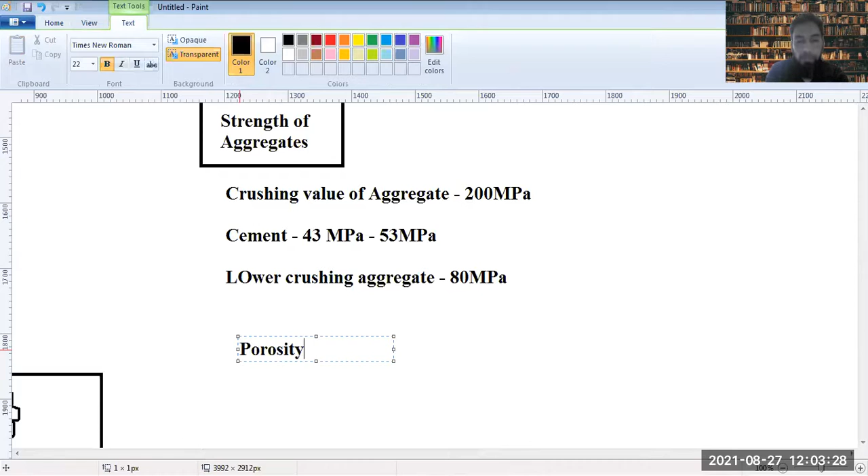So then comes the porosity of aggregates. Now, what is the porosity of aggregate? It is actually how much percentage of pores are there, the percentage of pores within the aggregate. How do you determine this? The easiest way to determine this is through the permeability and absorption tests.

An aggregate will have pores. A single aggregate would have pores. Now those pores would absorb water. So you fill up a sample with water, the pressure is applied, and thereby you're getting the amount of water that has gone into the pores, how many pores have been filled up.

So the absorption test is much simpler. You just keep the aggregates within the water, and then you check for its moisture content by taking it into the oven. So you check the mass before and you check the mass after you have put it in water.

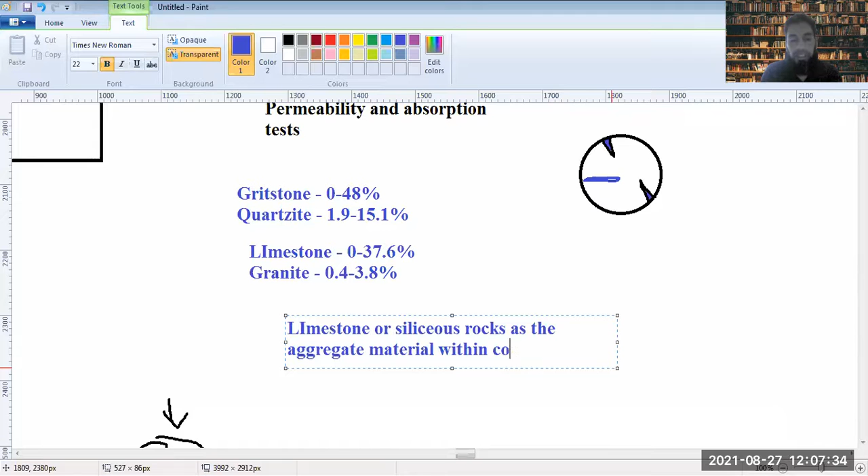The concrete, the reason being they are cheaper, and there is a covering of cement over the aggregates most of the time. Thereby, even if they have a large amount of porosity, still being cheaper, we use them. Otherwise, we would have gone even with the basalt rock, which has lesser porosity, and that stone is even greater in strength, but it would make a very costly concrete.

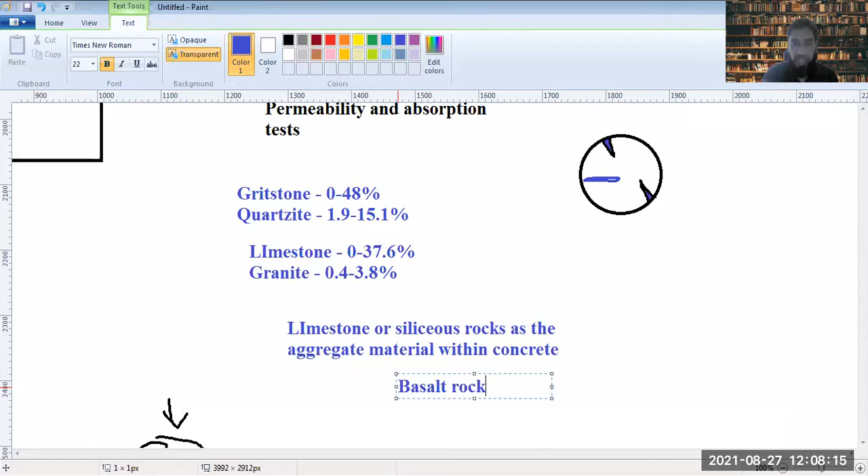A basalt rock or a granite rock would make... basalt rock is black in color. Somewhat like this. Yeah, the basalt rock. This is the basalt rock. So these types of rocks are quite costly, they have less porosity, greater strength, but you cannot use them in ordinary concrete because that will make the structure very costly.

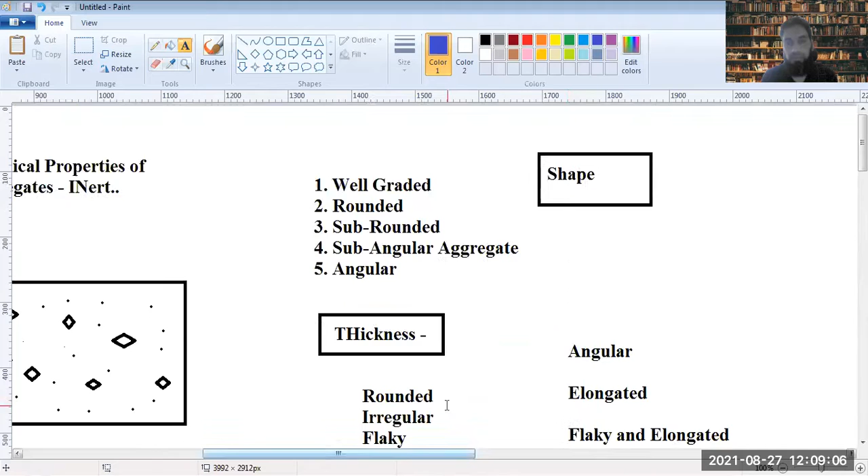So finally, coming to the gradation of aggregates, how do we get to the gradation of aggregate? Now, what is the gradation of aggregate? First of all, I just told you a term, graded aggregate. Gradation means from top size till bottom size, what are the various grades and their percentage? In simple terms, this is what it means.

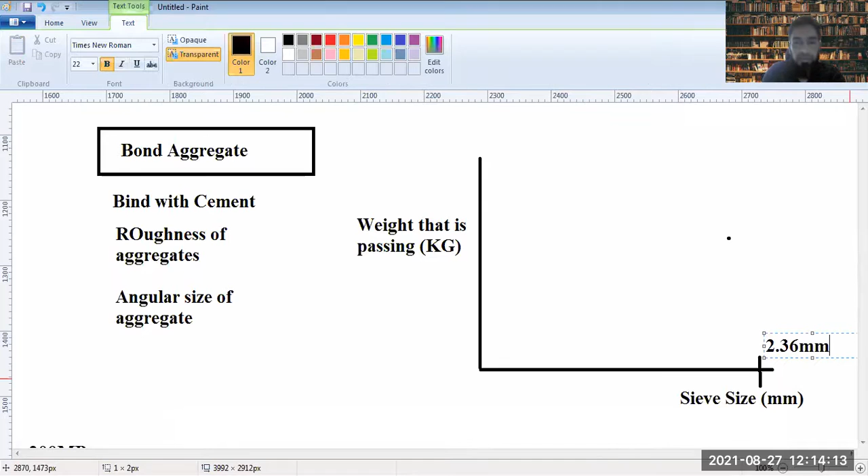Then the greater the sieve size, for example, this is 2.36 mm at the end, and here, for example, this is 150 microns. In terms of mm, that would be 150 into 10 raised to the power minus 3. So then what is the weight that's passing through here? That's very important. So the weight that's passing here would be somewhere here, this much, for example.

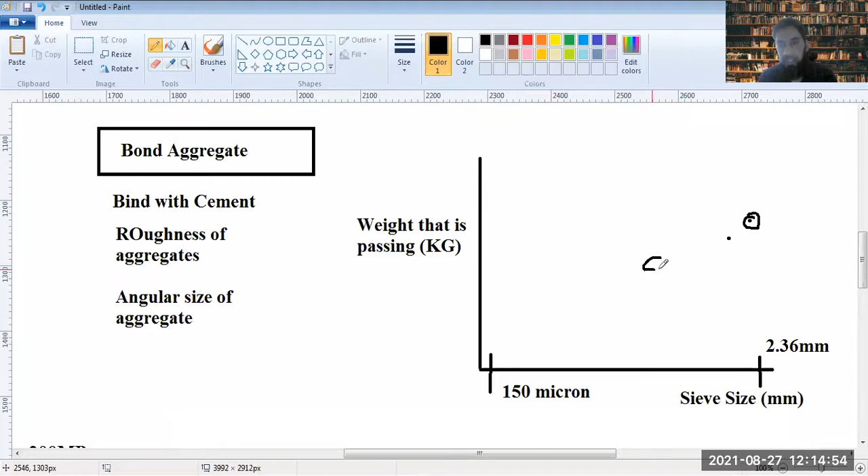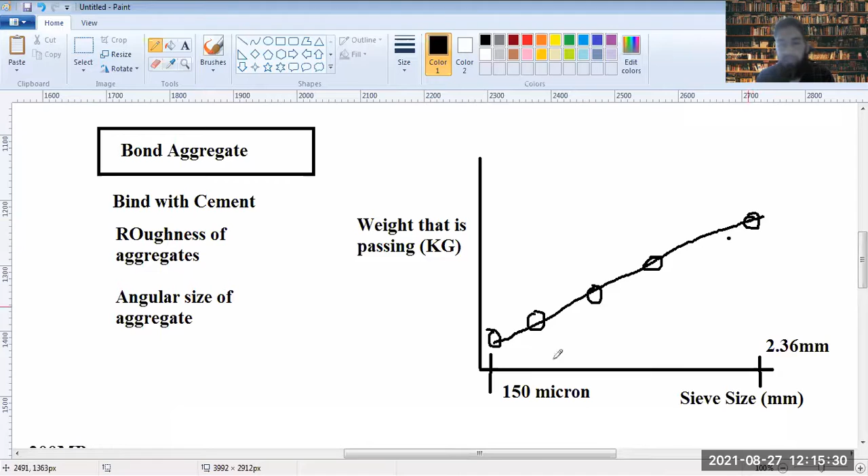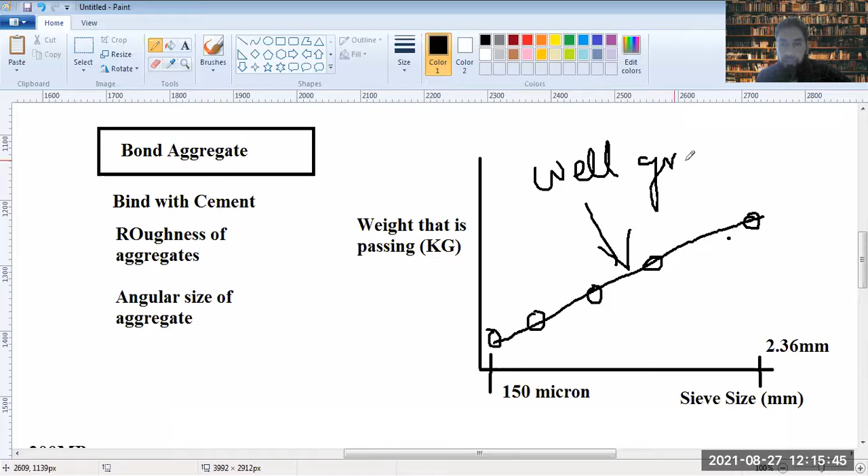Now the weight that's actually passing through would keep on decreasing with the decrease in the sieve size. And what is retained would be the converse of this, which I just showed you from the figure. So the graph would look somewhat like this, going towards the top. Now, if it's well graded, the graph would be straight like this. This is a well graded graph. It would be a uniform graph, moreover a linear graph.

तो इसका ये मतलब है there are all sizes that are retained, there are all sizes that are passing. So it's a well graded mixture. But if you have a graph somewhat like this, और बीच में कहीं पर ऐसे gap आ रही है, so there is almost nothing passing between these. That means these sizes are not existing. So this is gap graded.

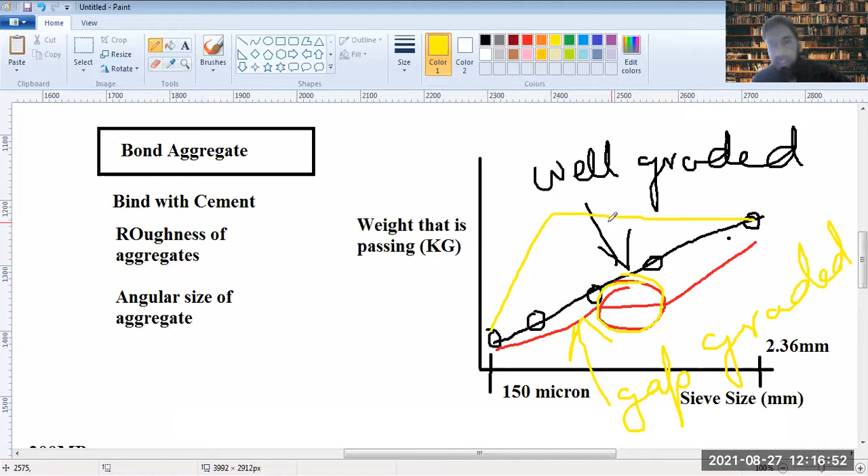This is gap graded. So this tells you that there is a gap. There are top sizes and there are bottom sizes. Beech wale sizes missing hai from the sand mixture. And the poorly graded would have sizes at the top or sizes at the bottom and very few sizes towards the lower sizes. So this is the poorly graded one. So we require a well-graded composition.

Deleterious material, that means इसमें कूड़ा करकट नहीं होना चाहिए. Now, if that is present within the sand, it will not react. Its strength will be less, so it will not give the strength. If it's organic deleterious material, it will start to degrade. So any kind of deleterious material within the sand, or within the coarse aggregate, is not allowed.

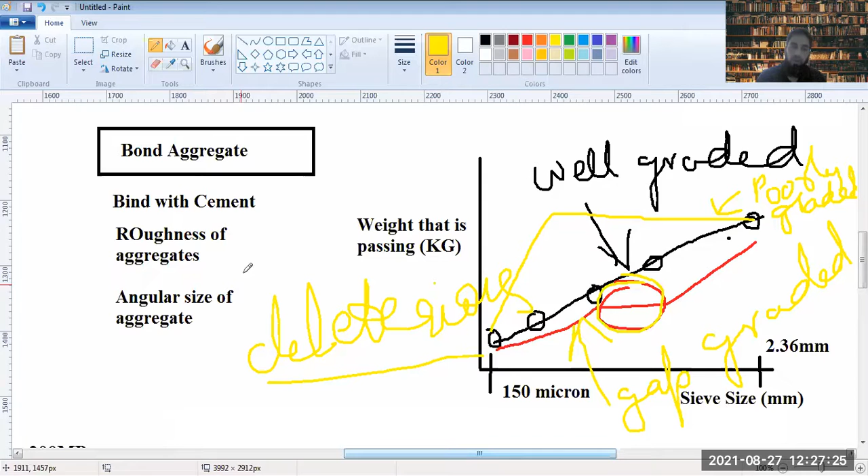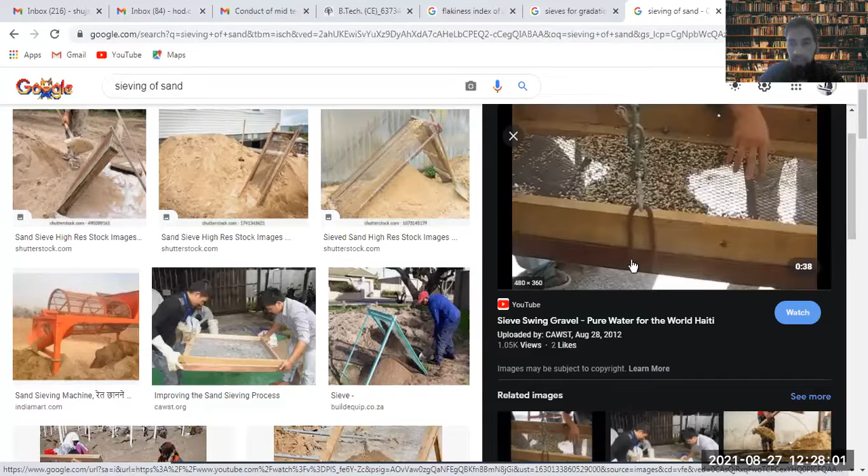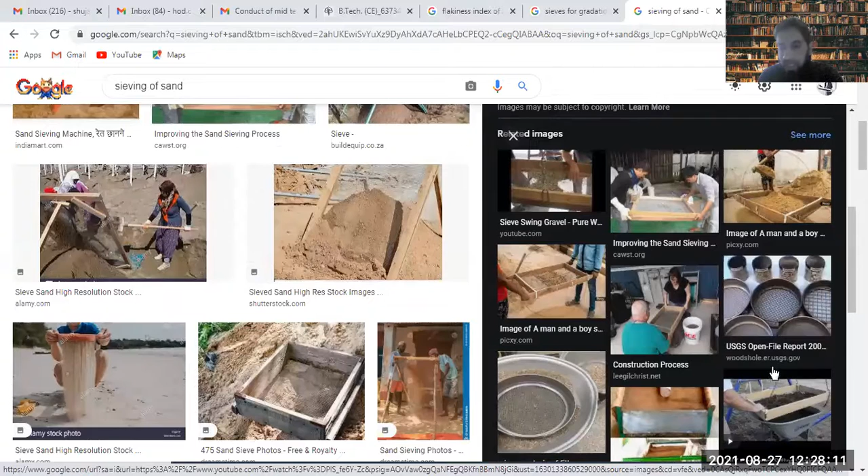So what we do, और जो पहले construction होती थी, they used to sieve the sand first, like this. I'll be showing pictures. Sieving of the sand is done like this. On a large sieve, they take out the big particles first, and then they just हाथ से उस पे, because all the small particles which are not going through, they can take it out. But at the same time it is washed. अगर यहाँ पर कोई picture है, so washing of sand after sieving is important.

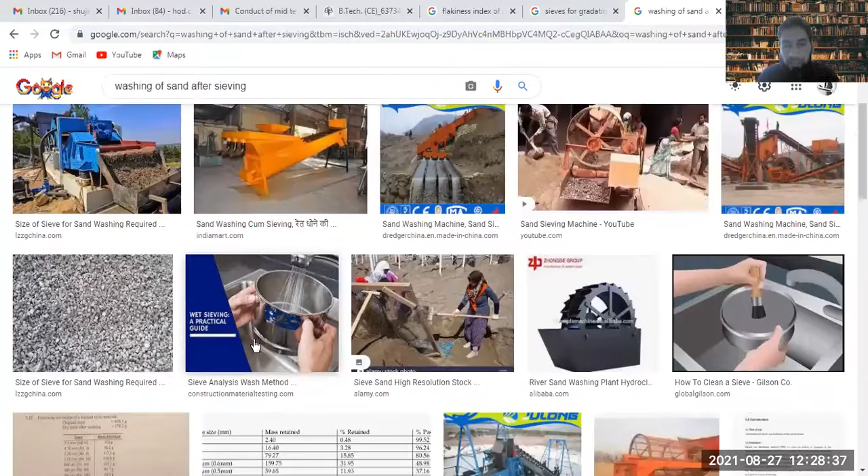So the sand needs to be washed as well for any construction. So in a construction site, you are sieving the sand. Whatever sand you are getting, it should actually be washed. Similar is with the coarse aggregates, with the gravel. More so in case of gravel, you require the washing to be proper. Not that much for sand, but gravel has to be washed. Now, how much do you see this being followed here?

This is the washing of the gravel being done. So जो इसमें मिट्टी के particles होंगे, sticking with it and all that, they need to be taken care of. So washing is done even at the small scale level. Let me get a picture of that. So now